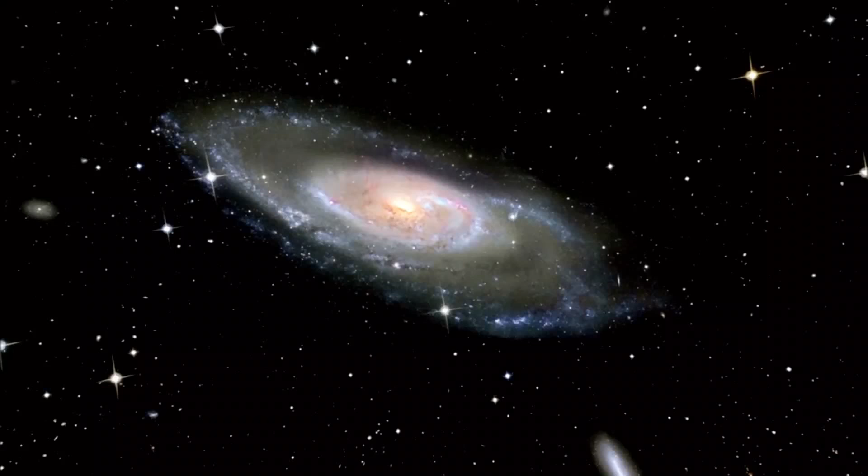As a scientist, I have to build the puzzle pieces that I need to build this history of the universe. The Canada-France-Hawaii Telescope is multifunctional. We need to think about solutions to improve the instrument, to make things work. One of the most impressive discoveries we made here is an object that came through the solar system, and we were able to catch it. So we're trying to predict the evolution of the universe for the future.

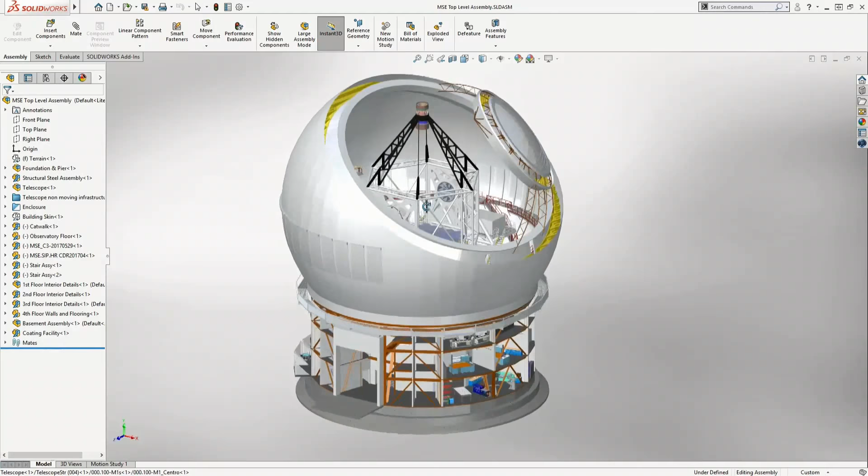So if we look at SOLIDWORKS 2019 here, and we look at Greg's model, the entire telescope, there's about 7,500 parts in here. And you can see as I grab this and just move it around on the screen, it actually feels like it's a simple block on the screen. So you can zoom, pan, rotate, very fast, very rapid. It feels—I think it's a feel. It's one of those things that it's a feel.

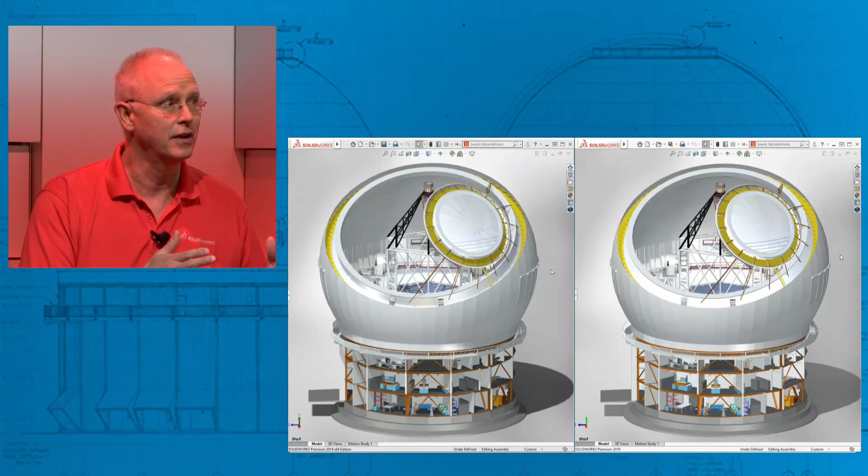If we take a comparison and try to compare what it was like in SOLIDWORKS 2018 compared to what it's like in 2019—18 on the left, 19 on the right—you can see that kind of chunkiness as the mouse has to catch up. Sid can talk better about this, but from a development point of view, they call those dropped frames. We have to drop those frames in order to get the model to rotate. In 2019, there's none of those—they're dramatically reduced.

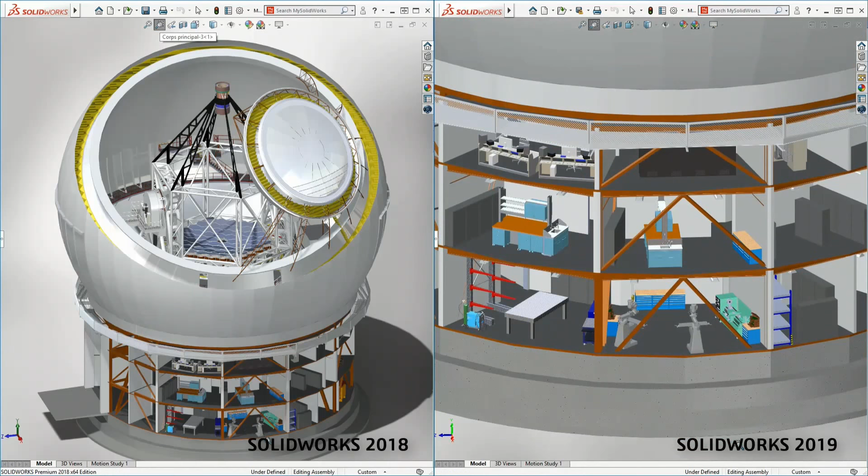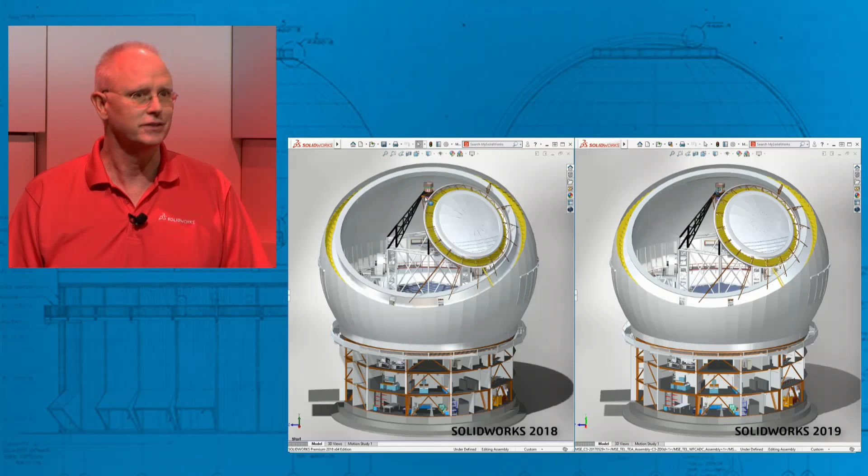It just feels so much better to interact with your model, zoom in, get to where you want to go, and visualize things so much better. You're still going to work with your assemblies—it's just going to feel better. I think Sid describes it as an emotional thing, and it really is. It just feels like, wow, this feels like I'm rotating a block around on the screen.

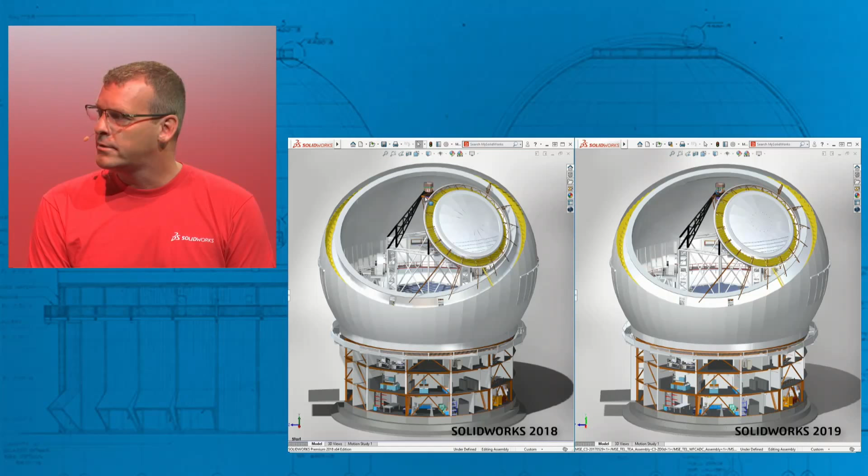So to leverage this, do I have to turn on a special mode or anything like that? That's a great question. So what we're doing with this new graphics work that Sid has worked on is we've pushed a lot of the work we did up onto the graphics card. So instead of it being on the CPU or the main chip, it's now getting pushed up onto the GPU, or the graphics card.

We've done a lot of things in the past with large assembly mode to make an assembly perform and interact a lot better, in large design review and these different modes that we have. And we did that, but when you did that, you lost your real view, you lost your edges, you lost your shadows, and a lot of the visual appeal.

And with the new stuff, you can do this. You have your full real view, full shadows, reflections, ambient occlusion—things like that are available in any mode: large assembly mode, part mode, fully resolved, lightweight, LDR. It really doesn't matter.

We're going to see this in other places in the software too, right? Right, Sid can talk about that. Yeah Sid, this is pretty groundbreaking. I have to imagine some really interesting technology or thought went into this.

That's right. One of the things is that our customers are really passionate. They're amazing—they spend a lot of time building huge data sets, putting in a large number of materials to make the data sets look good. And when you have to deal with millions of polygons with hundreds of materials, it becomes quite a challenge of how do we make this as performant as possible for our customers.

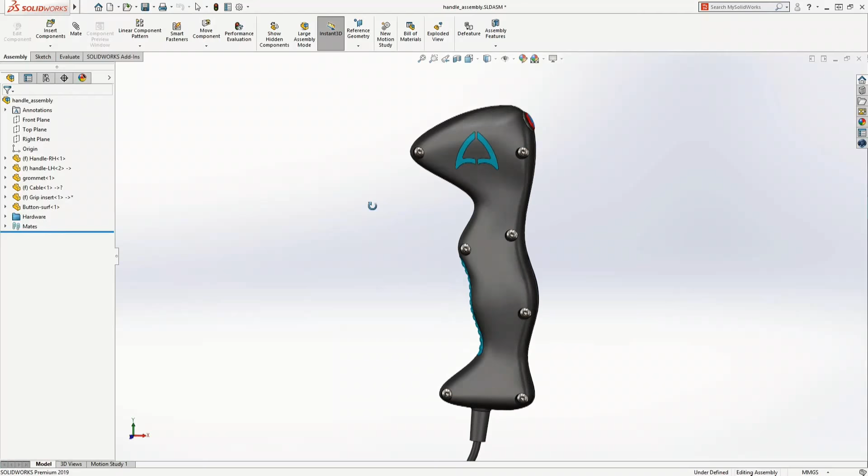Marlon mentioned the mesh modeling, and a lot of people are adopting mesh modeling, whether they're getting information from scanned models or artistic type of stuff. So this model we have on the screen here is kind of a handle, an organic shape. In this case, this actually originated from a 3D scan model.

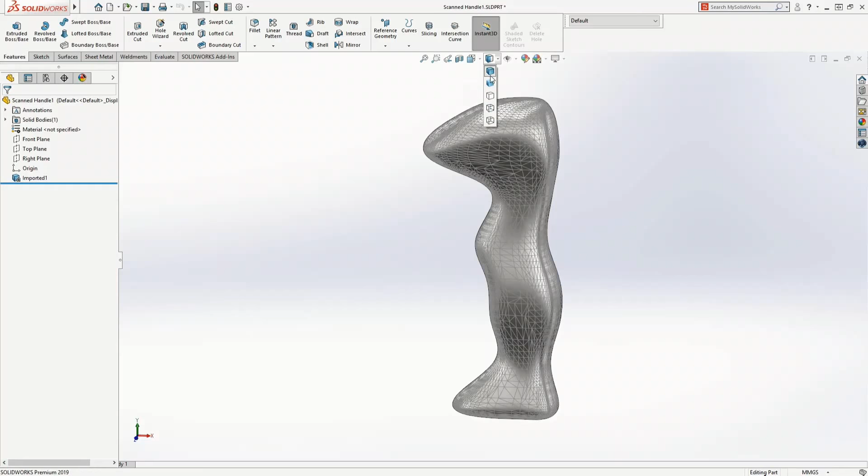So we're just opening a 3MF file. You can clearly see this is a mesh model - you can see all the mesh edges on there. But what people want to do is take this scan model and actually turn it into an engineering model that they can shell, add ribs and standoffs and all the internal stuff they want. So we added this new slicing tool.

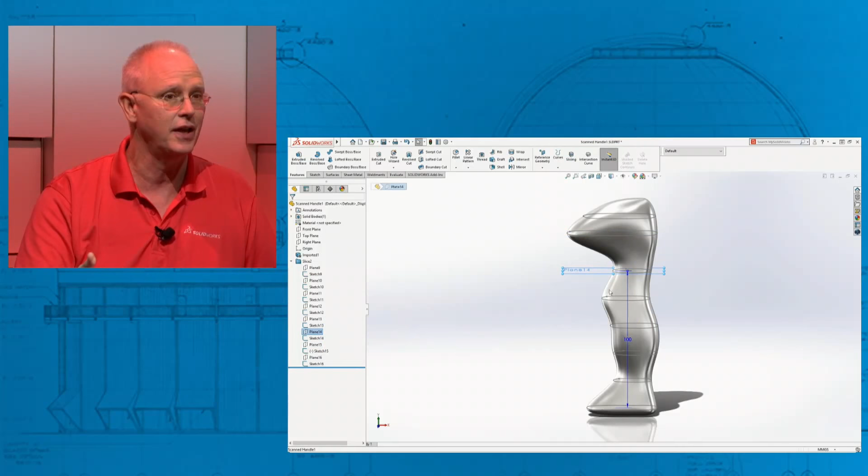You choose a plane, you choose your offset, and SolidWorks creates a folder full of planes and offset sketches that are fully editable. So you can set these up to start using these sketches to build your model. We'll turn off the mesh body and just use standard SolidWorks modeling techniques, leveraging that mesh information, then just grab these curves that were created, and there you have it - we have a surface already started to build our model. That's one of the cool things.

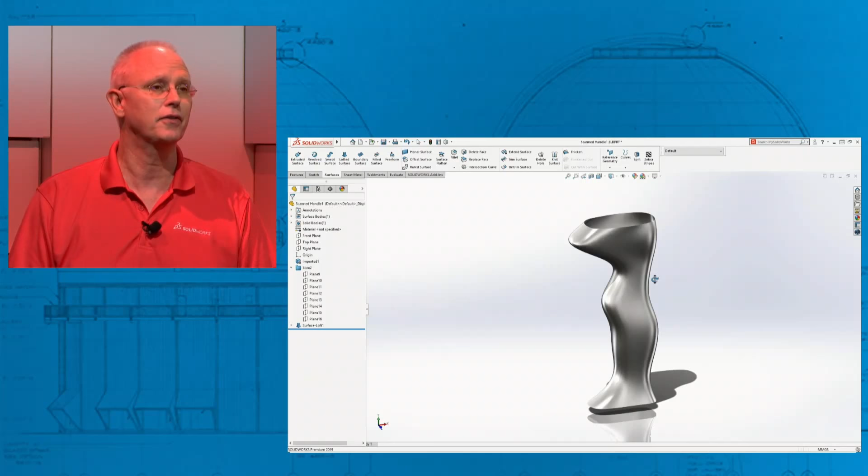As Marlon and Sid mentioned, the 3D texturing stuff - if you have a model like this grip insert here, this little blue part, maybe we want to experiment with various different grip patterns. You can see that's a lot of features - there's 14 or 16 features to do that. The new 3D texturing allows you to do this rapidly.

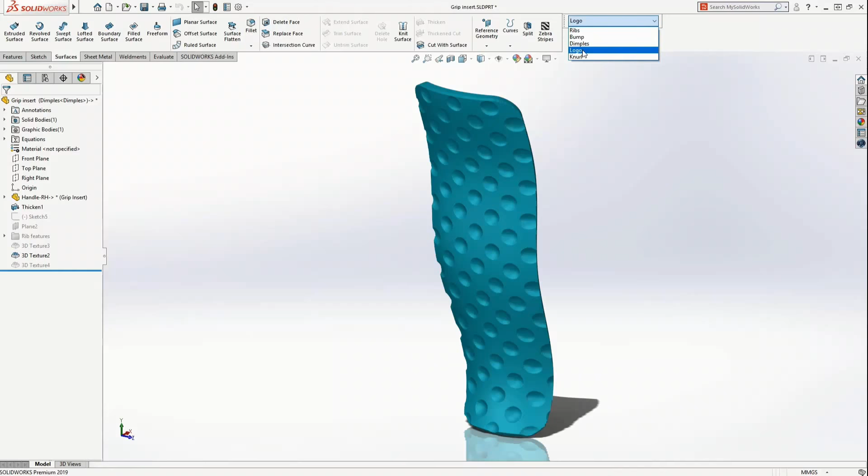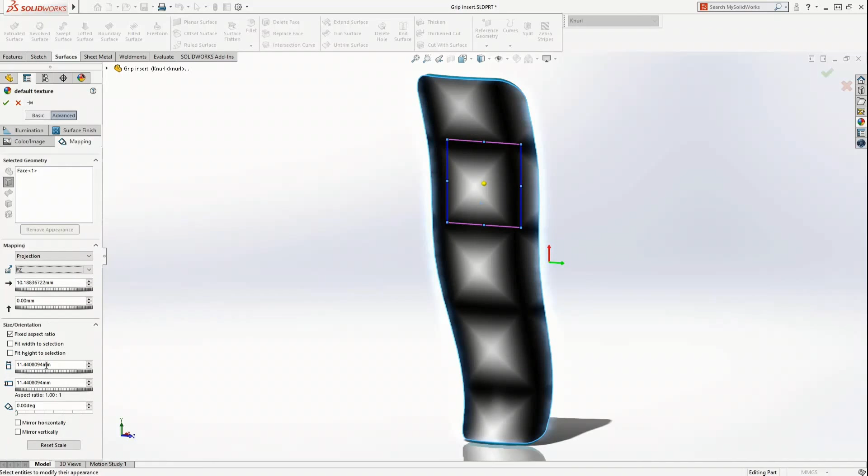Instead of having to model those dimples or bumps or even something like this logo, we've given a new methodology for doing this. You're familiar with applying textures or appearances - I'm just going to drag one of these from the task pane onto the model, standard ways of applying materials you've been familiar with in the past. In this case we have a knurl pattern, change the size, change the rotation. So all I've done is apply an appearance.

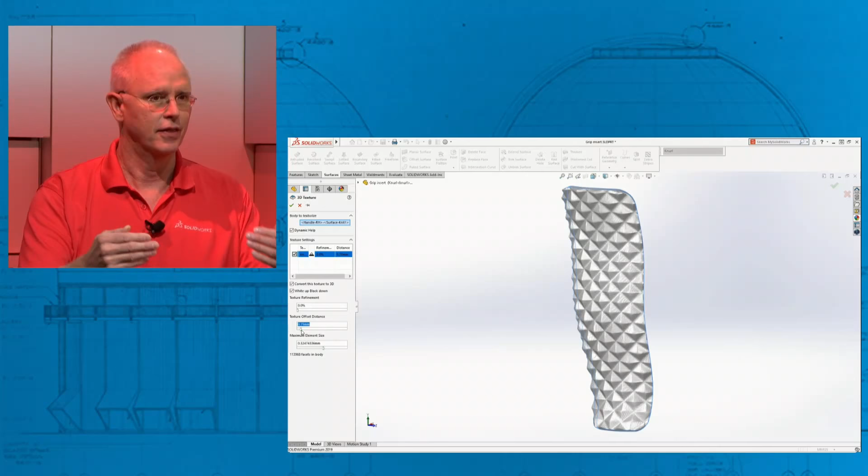Now we have this 3D texturing tool that leverages that appearance and allows me to turn it into mesh geometry. I have controls over the mesh size, I can change the height at which I want that to pull out. The lighter colors pull farther out of the material and the dark colors stay back. So what I've done is use this new tool to create a mesh model.

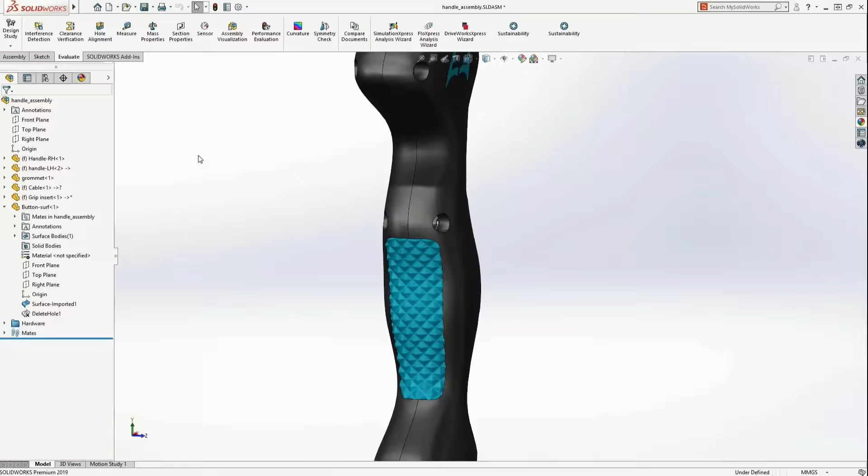This mesh model can then be used downstream for manufacturing - maybe I'm just building prototypes, I might want to create a 3D print of that. So that's a mesh model, and 3D printers accept mesh models - that's their basis of how they build stuff. That's a cool way to leverage this whole mesh modeling methodology to take it from start to finish.

Yeah, that was a huge time saver thinking about having to create all those details as features. There were 16 features just for those horizontal ribs, which are a little easier to do, but trying to create that knurl pattern, all those dimples, all those bumps, that's difficult. We're really doing a lot of stuff with mesh as a geometry type inside of SOLIDWORKS, and we're going to be discussing this a little more later today.

Now, Marlon, that was a big feature - that's like new technology, new feature. But you also look at improving existing features and workflows, right?

From all the feedback that we gather, we see new capabilities that we need to implement in SOLIDWORKS, but also we look for opportunities where we can make the user's workflow more efficient. They can do the same thing now that they could do in a previous release, but we work to make it more efficient, so their experience is more enjoyable and faster. Ultimately, the goal is to save time. We call these projects Delighters internally.

Any delighters that stand out in your mind that are going to be really great this release? I really like partial edge chamfer, and we've also made improvements to projected curve, to make geometry you could create in the past, but now it's a lot more efficient in SOLIDWORKS 2019.

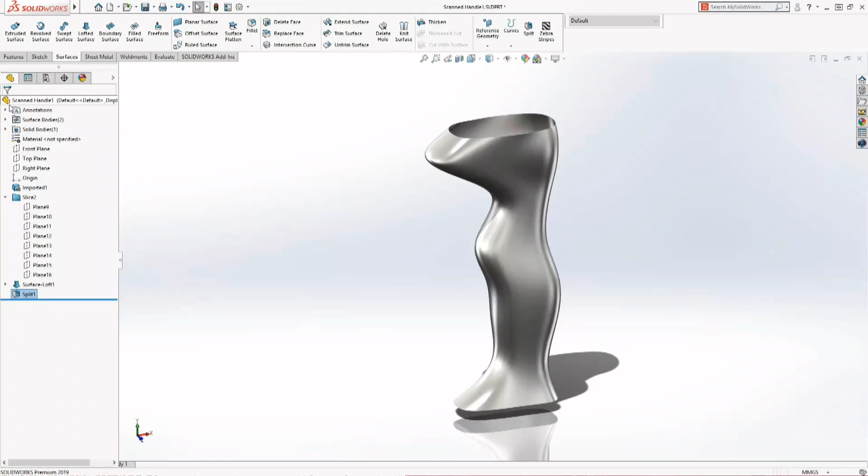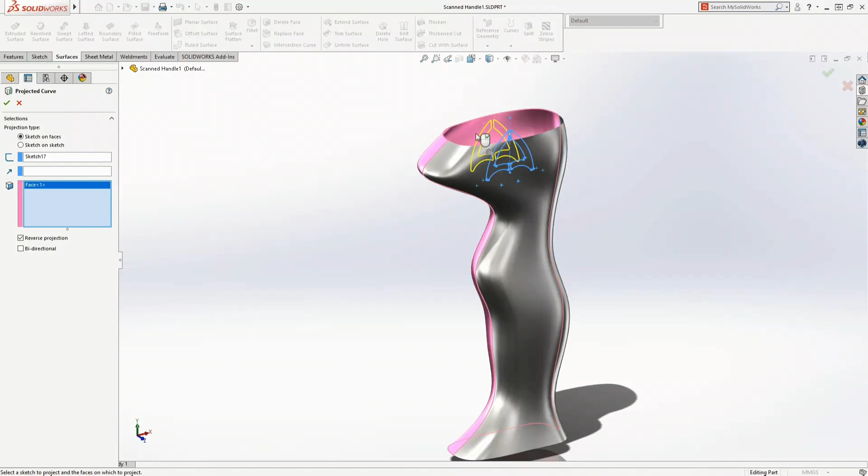So in this case here, we have this handle we kind of got started with, and you can see there's two surface bodies in here. In the past, we could only project in one direction onto a single surface body, and we could also only do a single closed or open profile to get that projection. Now in SOLIDWORKS 2019, multiple closed or open profiles can be projected onto multiple surfaces and bidirectionally. Here we're going to choose the bidirectional option, and it puts it onto both surfaces.

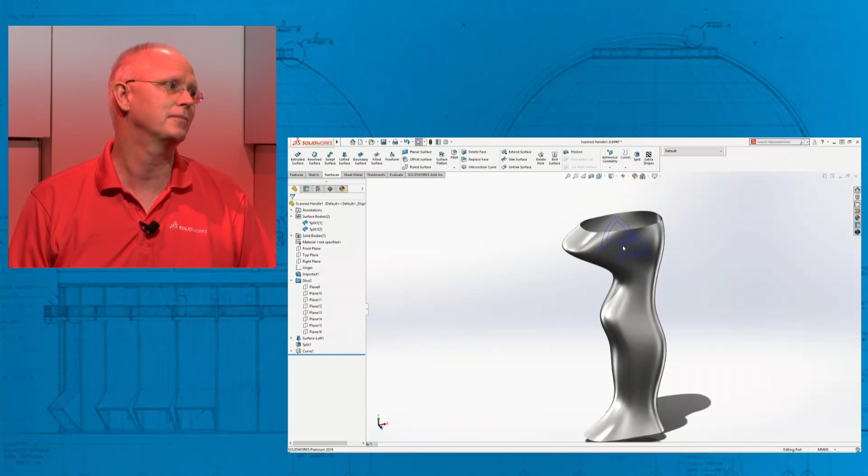Jeremy, in the past this would have taken 2 sketches for the 2 closed profiles and then 4 features to project it onto each side. So we've gone from 2 sketches and 4 projected curves to a single sketch with a single projected curve. A lot of big time saver there. Not only is it an easier workflow, it's less features in the tree, less steps, and everything's stored in that single feature.

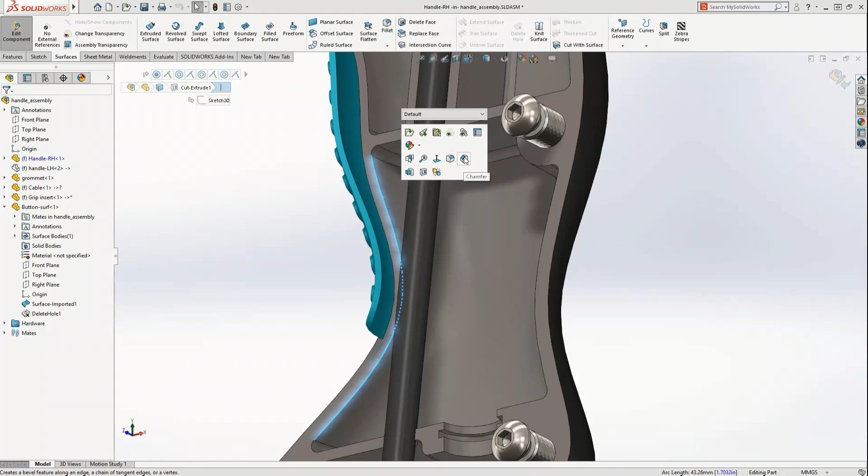The other thing that's interesting is the partial chamfer. You can see I did a little quick interference detection, and I have an interference problem, so I need to knock that corner off of this model. I'll edit that part, choose the edge, and chamfer it. But I really don't want to chamfer that whole thing all the way around, so we've introduced a new partial chamfer tool.

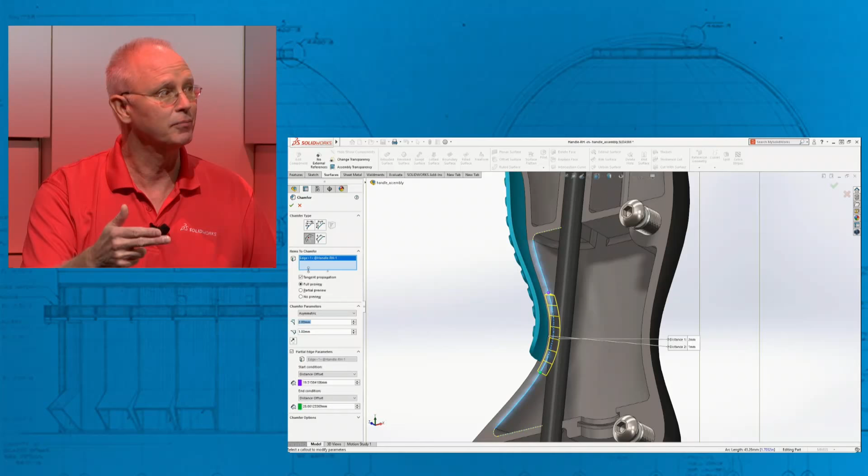I have various options for how I want to control the distance, or I can just use the drag handles right on the screen. These can be symmetric or asymmetric, and by the way, this is a chamfer, but this can be done for fillets as well. I can switch back and forth between chamfer and fillet, as we've had in the past. We could have modeled these things before, but there's a lot of extra time and steps involved to achieve that same goal. This greatly simplifies that process of defining that.

So these are some really cool features, and there's a ton of new features also on the What's New section of the SOLIDWORKS website where you'll be able to see them. We're just showing some of the real highlights here today.

But Marlon, you were mentioning you get an opportunity to talk with customers a lot. We have SOLIDWORKS World coming up here in the near future. You're always busy at SOLIDWORKS World, right? Yeah. Tell us about that, how customers can engage with you at SOLIDWORKS World.

For us in product definition, it's like drinking from a fire hose at SOLIDWORKS World, because for us it's a 5-day event. It starts on Saturday, though the conference officially starts Sunday evening. On Saturday we're doing alpha testing with customers, and all day Sunday we're meeting with customers throughout the event. In fact, we take a break just to give our presentations during the conference. The entire goal is to learn more about the user's experience using our software, what enhancement ideas they have, and what things we can implement in the future.

When you register for SOLIDWORKS World, which you can do today, there's an option to say you would like to participate in our research activities. If you check off that option, that's how you get invited to the Saturday and Sunday events. That's great.

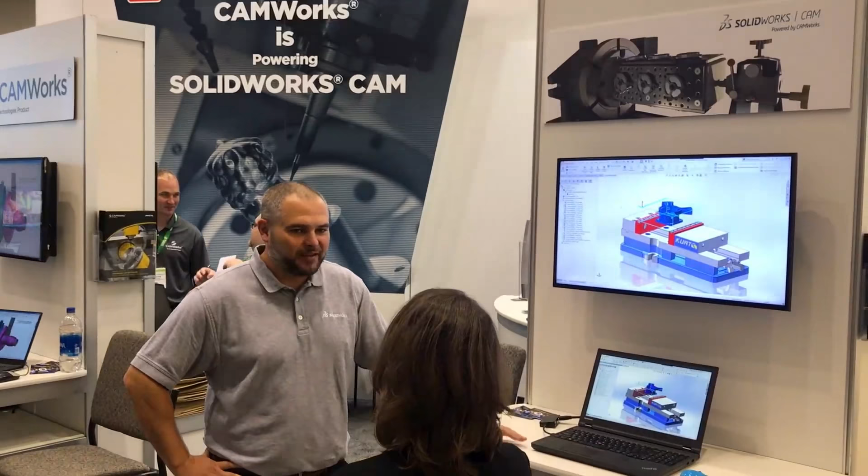Hey, we're here at IMTS. We've caught up with Mike Buckley. Hi, my name is Mike Buckley. I'm a product manager for SolidWorks, and I'm in charge of SolidWorks CAM and our subtractive manufacturing. One of the reasons I'm into manufacturing is I love building and restoring old cars.

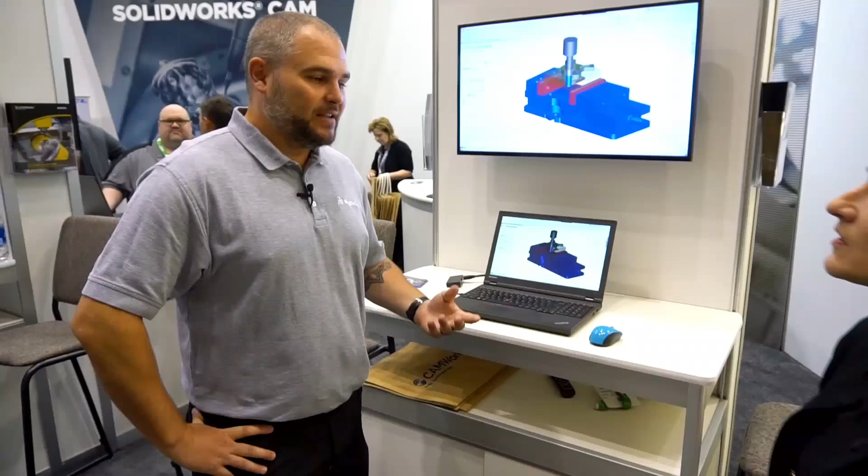So Mike, we're here at IMTS. SolidWorks is everywhere at this show, but SolidWorks CAD, everyone knows that. SolidWorks CAM, that's pretty new. So first thing everyone needs to know is SolidWorks CAM Standard comes with every seat of SolidWorks. Starting with SolidWorks 2018, we actually released SolidWorks CAM Standard and SolidWorks CAM Professional. CAM Standard is available to anyone on subscription, so every seat of SolidWorks has that.

It allows you to do basic part machining. And then SolidWorks CAM Pro is actually for people that want to be more productive. So we've added things like assemblies, turning, volume mill for high-speed machining, those components. So it's a pretty exciting time to use SolidWorks and CAM together.

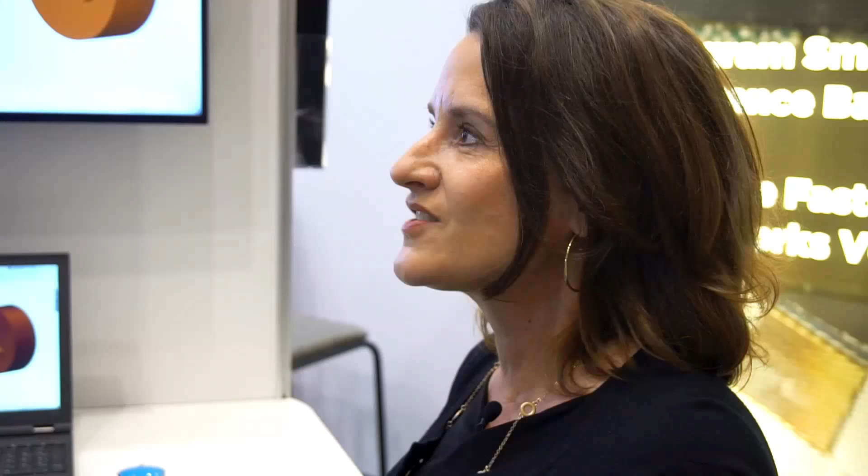So SolidWorks CAM 2019, what are our customers going to be most excited about in terms of new enhancements? There's some really cool things coming in 2019. The first thing is tolerance-based machining for turned parts, so we can apply the MBD data automatically to the toolpaths we create inside SolidWorks CAM. It's going to really speed up that process and create a program that's going to be right the first time.

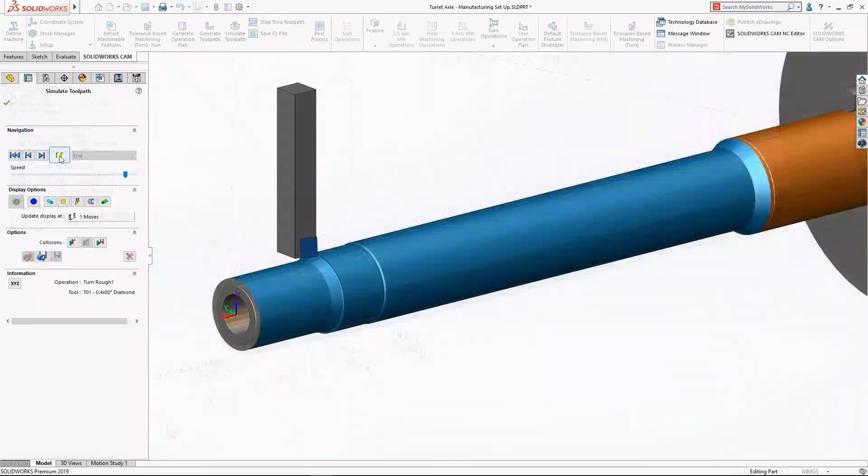The second thing, which I'm really excited about as a mill person, is for VoluMill we're adding rest machining, so I can come back and clean up the pockets with smaller tools and maintain tool life, which is pretty important for some of us that have to buy our own tools. We can also do zigzag on high-speed machining, so if I'm cutting a really long part, I can remove more material faster.

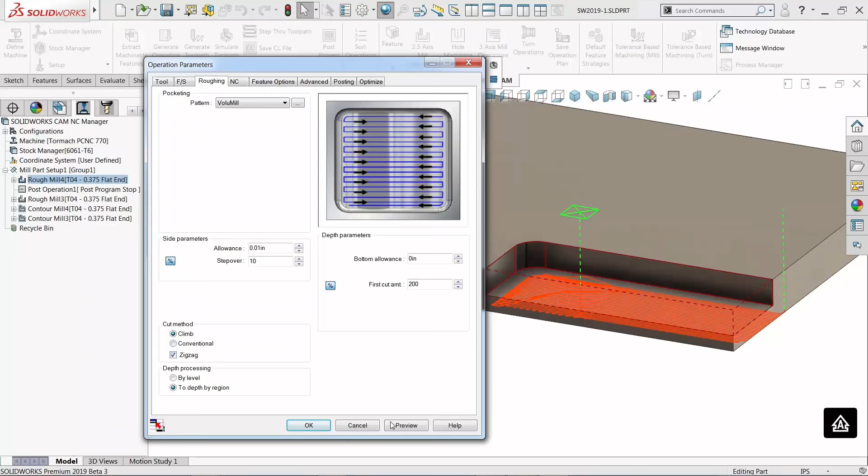And one of the things that's going to be really good for customers with lots of different types of machines is I can do machine-specific rules in SolidWorks 2019. So if I have a mill and a lathe and a water jet, I can apply specific rules for each of those machines automatically. It's going to be really cool for our customers to automate that process from start to finish.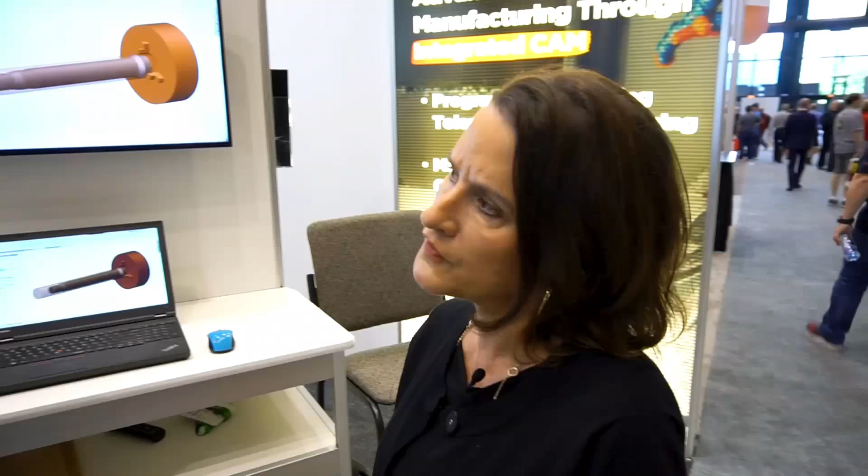The first thing you mentioned was tolerance-based machining for turning. What exactly does that mean? Yeah, it's a really good question because we get a lot of those questions when we start talking about tolerance-based machining.

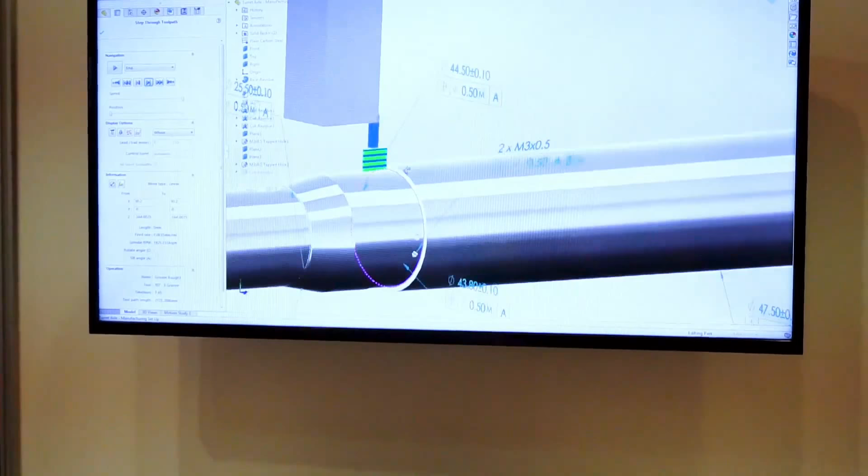So the first part is we actually use the dimensions that were applied in the 3D model. We're using that MBD data that was created. We know what the engineer wants for specifications, and then we go through and read these tolerances on the part and automatically apply toolpaths. So we're taking what the engineer and designer wanted and their thought process, and auto-leveraging that for the machining strategy, making sure everything is in tolerance correctly the first time.

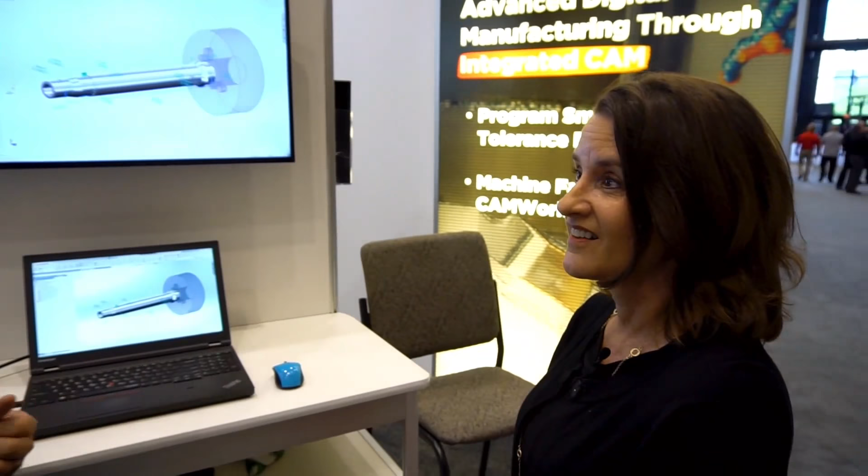Wow, that sounds like smart manufacturing. Yeah, it is. That's one of the coolest things we have today, being able to leverage that one file to capture all of the design and manufacturing intent. Now, does that extend further downstream into quality and inspection?

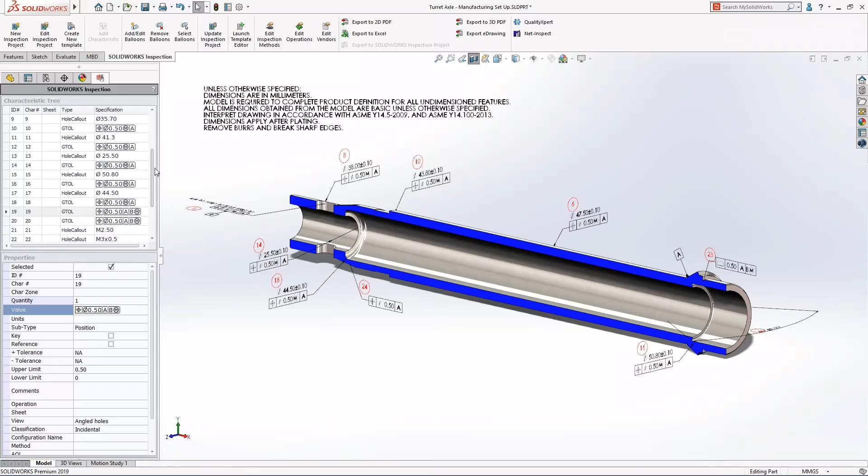The great thing about MBD is it creates that container with all the data sets in. So if we apply inspections to this part, we can auto-balloon all of these. As we machine it, we know we're creating those tolerances correctly. From the inspection side, we have the automatic inspection report created from SOLIDWORKS Inspection, so people are keeping that consistency together. The cool part is if the design changes or a revision happens, all of that information updates automatically on the fly. There's no need to go to separate sources to update and track that information. It's a pretty cool process.

Users on subscription get CAM for free, which is awesome. And all these capabilities sound really exciting. But what about just the machinists who basically just need to open part and assembly files?

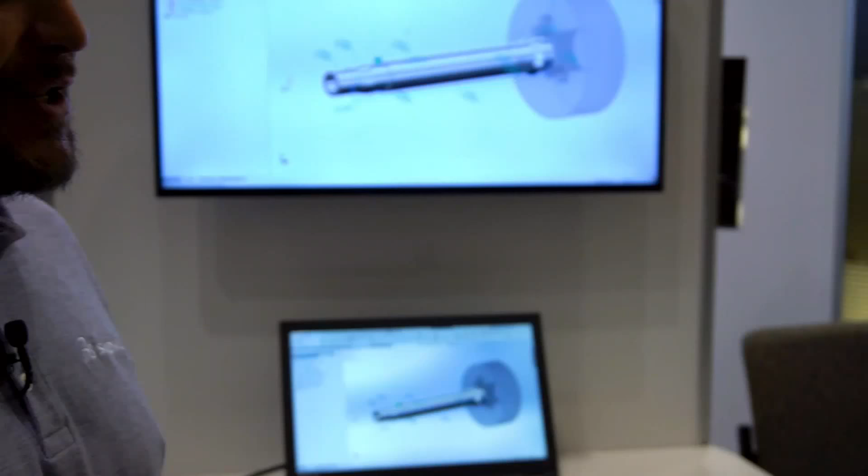That's a really good question. Starting with 2019, we've created two bundles: Machinist Standard and Machinist Professional. Machinist Standard allows a machinist or programmer to open up a SOLIDWORKS part file or import any customer's file and do programming on a part. Machinist Professional allows you to open up parts or assemblies, design fixtures, and then use SOLIDWORKS CAM Professional. So for people who may not need all that capability in SOLIDWORKS, we now have these packages that allow them to access all the cool things within SOLIDWORKS and all the great modeling capability we have, but still be able to put any of the high-end toolpaths on it that we need.

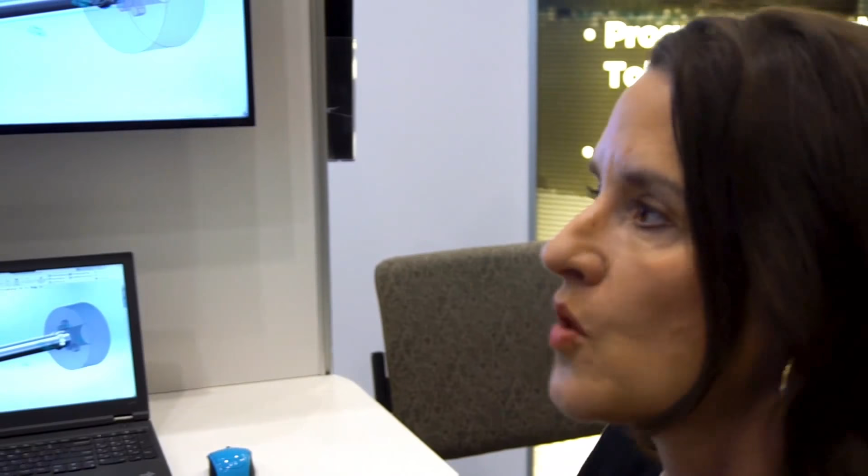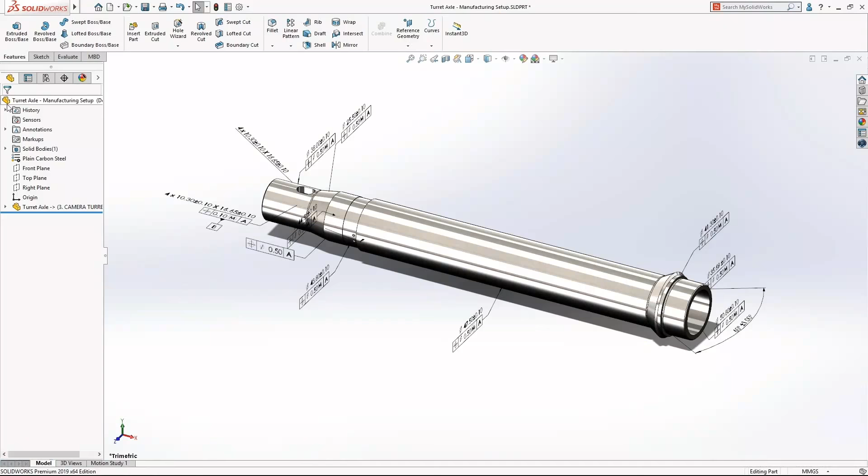The basic understanding of smart manufacturing is from start to finish, you have one file, one truth, where all of your data is stored. When you do concept, simulation, FEA, all of that information gets stored in the file. On the manufacturing side, we're talking about capturing inspection data, capturing PMI data, and leveraging that for CAM. The ecosystem within SOLIDWORKS allows you to have that one part or assembly as one file to rule them all, with the ability to store all that information. If there's a revision, a change, or questions, you just go to that one location and that is the truth of what's being built.

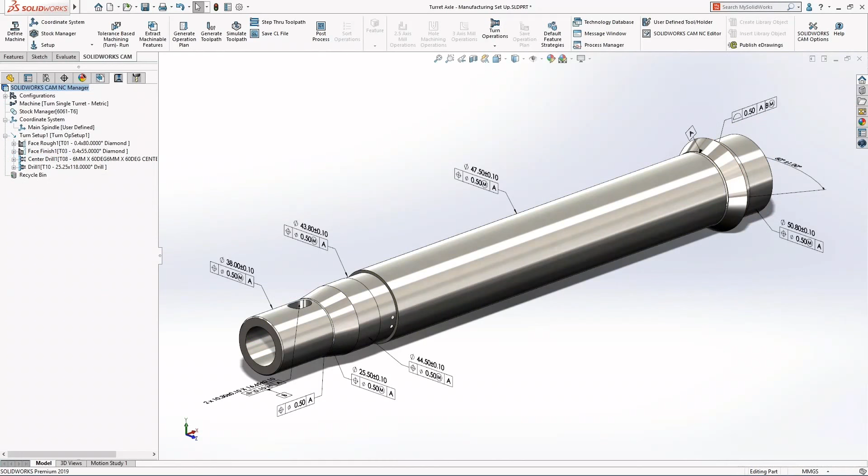A lot of systems today that aren't smart manufacturing require you to export or import all these different files. If there's a problem, you may not know where it resides. By having all of that in one file, we can tell where the problem is going to exist if there is one.

Wow, it sounds like SOLIDWORKS is all over CAM and there are so many exciting things happening this year. So is there anything else happening in manufacturing with SOLIDWORKS that we should know about?

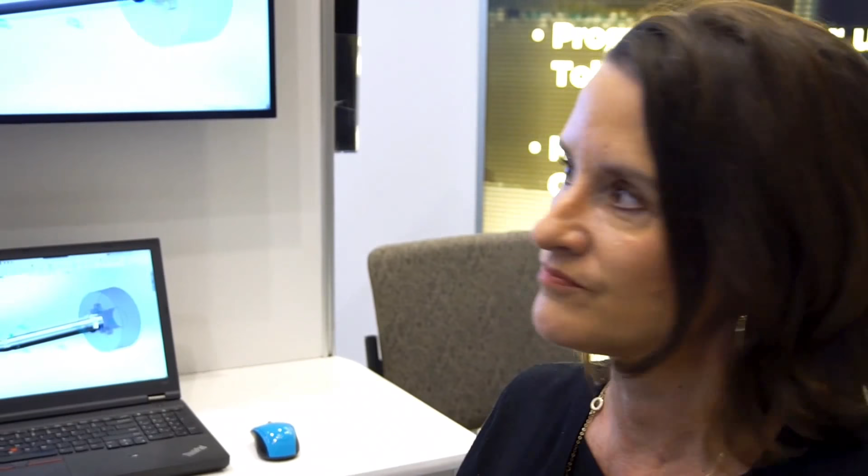One of the great things we're doing for our students this year is starting with SOLIDWORKS 2019 in education, which came out this fall: all seats of SOLIDWORKS education get SOLIDWORKS CAM Professional. Every student has access to MBD, tolerance-based machining, volume mill, all of the great things we've talked about. They all have access to that starting today. It's a pretty cool, exciting time for students to get in and build products.

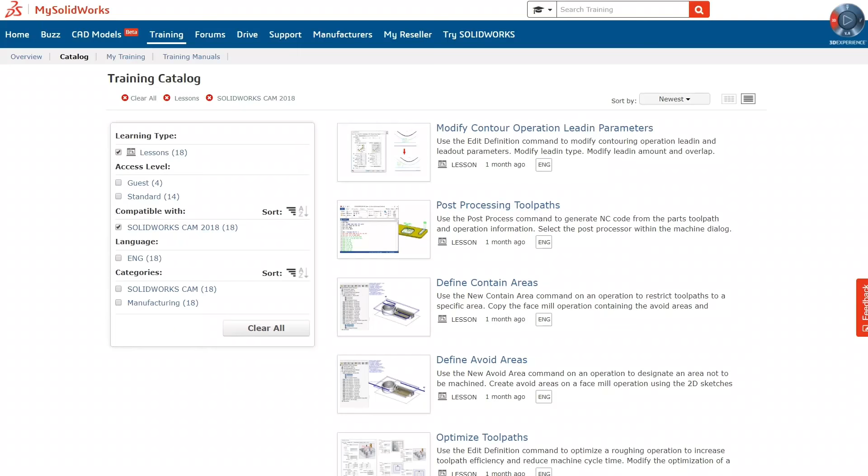So we just talked to Mike, we heard about all the cool new enhancements in SOLIDWORKS CAM 2019. We talked about milling, turning, tolerance-based machining, and of course it all starts with model-based definition, but even downstream to inspection and quality. SOLIDWORKS CAM 2019 provides all the puzzle pieces for your smart manufacturing initiatives.

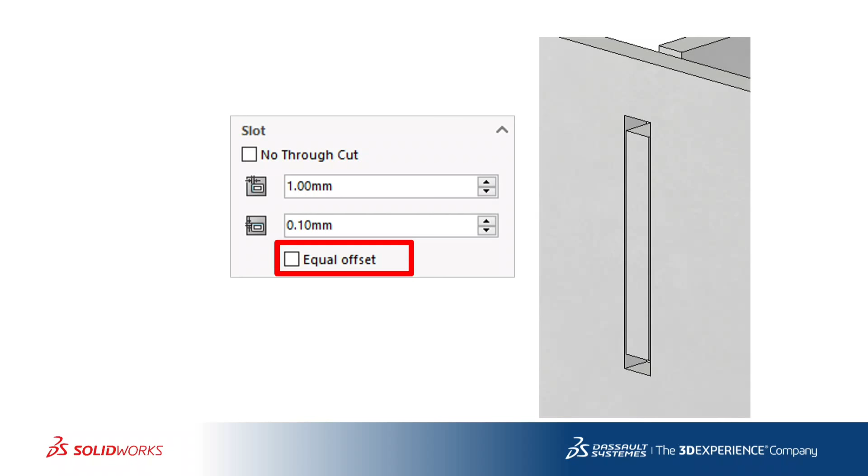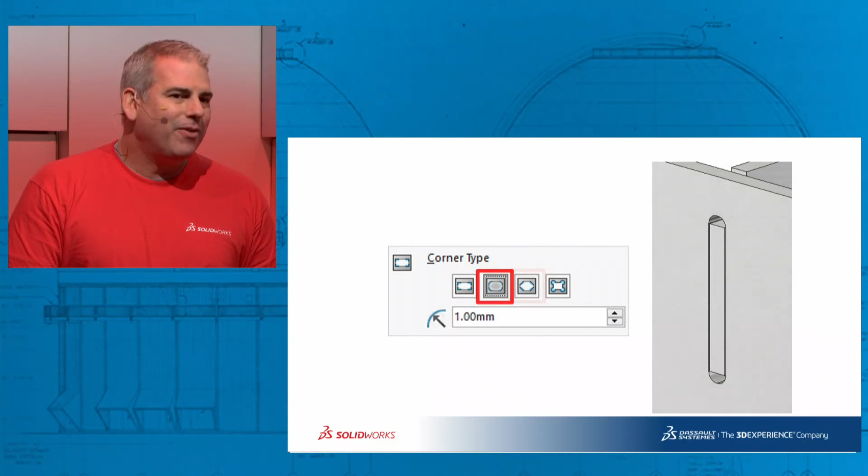So the very first one you see is in 2018, your tab was always centered in your slot. Now you can offset it - just a simple tab, but it makes it very easy for users. As we move forward, last year we had just a square corner, but in 2019 we've added round corners, chamfered corners, and even dog bone or circular corners in the edges. Again, this is critical when you make your flat pattern for the laser cutter and for downstream manufacturing operations.

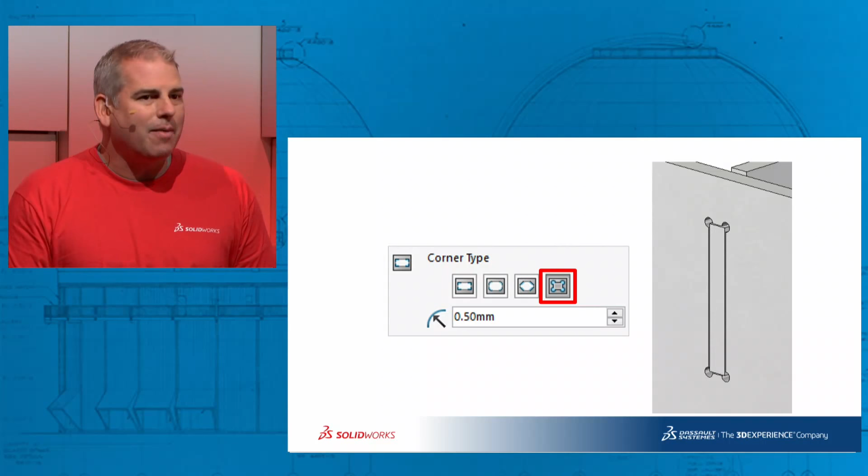So last up, this one's actually really neat. If you don't want to have a hole in your part where the slot goes, you can actually leave that out by not cutting it all the way through. So it helps make your design even more watertight if that needs to be the case.

So I have to imagine these ideas and features came from customers, literally like you were saying, they want to go right to the laser with this, and these are some great features. Now, we talk about designing for manufacturing - sometimes design has to communicate with manufacturing as well, and you were talking about some interesting experiences you've had there. Yeah, so on the shop floor, the shop floor has really gone digital.

When you go down to the shop floor, you used to see stacks of paper, 2D drawings that were paper. What you're seeing now are large flat screen monitors on the shop floor. Sometimes they're looking at a 2D drawing, but a lot of times they're looking at 3D models, and they're able to interrogate the models, modify them even on the shop floor. It's really changing the shop floor by having these electronic capabilities, monitors, PCs on the shop floor, and you're able to actually get directly to the 3D models more conveniently.

And we've always had a really great tool for this that we're doing some stuff with in 2019. You want to tell us about that? Yeah, a couple of tools, and obviously our big one, eDrawings.

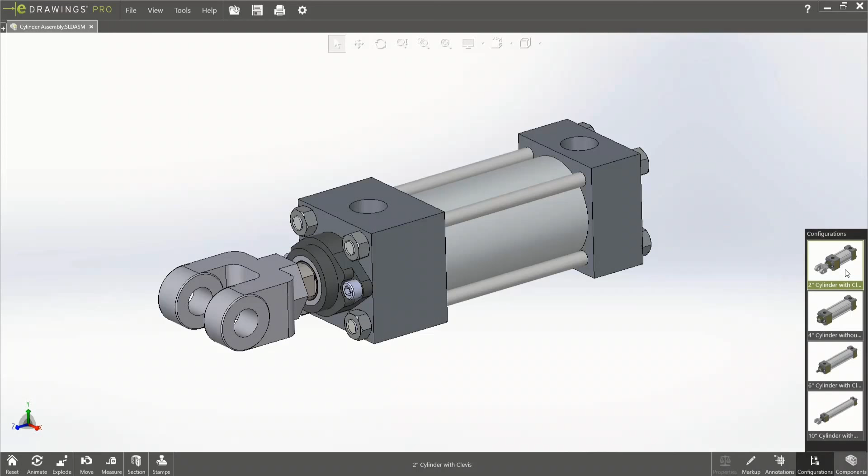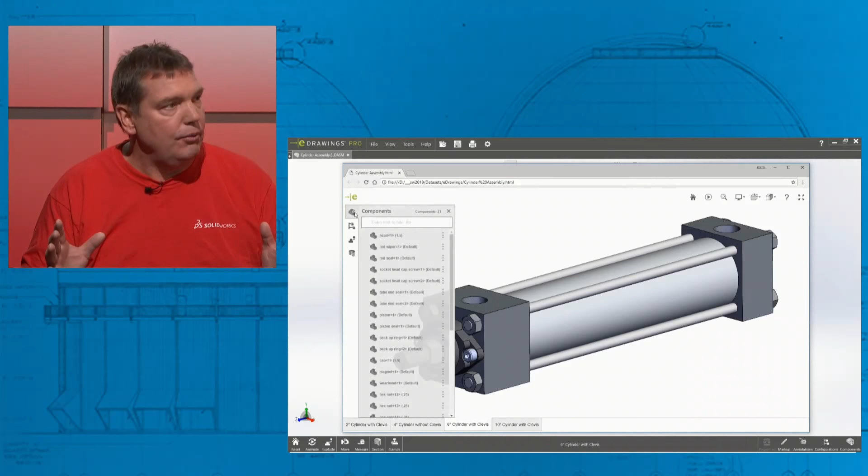In eDrawings, we've added the ability now to open more file types, so STEP, IGES, and also native CAD file types from other CAD systems. We've also added the ability to natively open configurations from SolidWorks files, from PRT and ASM files. And then lastly, and most importantly, I think the big thing is we can save as web HTML. So I can open that file and not have to do any kind of download at all, and just open it in a web browser. So I don't have to send you an eDrawings file, or have you install eDrawings.

Nope. Anybody on any device pretty much can open an HTML file, right? Right, exactly, anybody. That's great, and I think a lot of users know eDrawings is a great tool for sharing a 3D model with somebody, but sometimes it's more than just sharing a model. Sometimes it's taking the data from the model and going further, communicating design ideas or downstream applications.

Kurt, you have a lot of experience with this. Yeah, a lot of companies say we don't get paid until the final technical documentation goes to the end user. So we're talking assembly instructions, user manuals, maintenance manuals - all of that stuff can be brought in, concurrent in the design process with SolidWorks Composer.

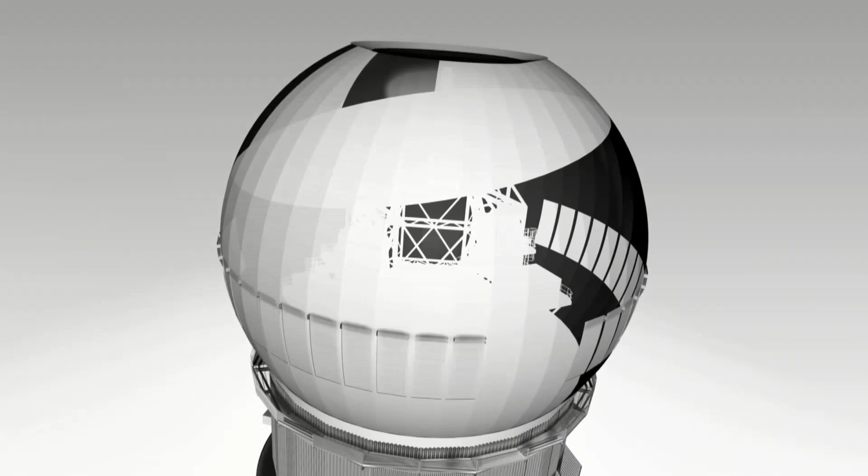And Composer's seen a lot of new enhancements in 2019 as a communication tool for this type of technical communication. In fact, one of the things Greg's going to be using it for is to share their ideas about what the new telescope looks like, up to their stakeholders and funders. So all of that information is right there for the user in one simple spot, fully created and fully associative to the SOLIDWORKS model.

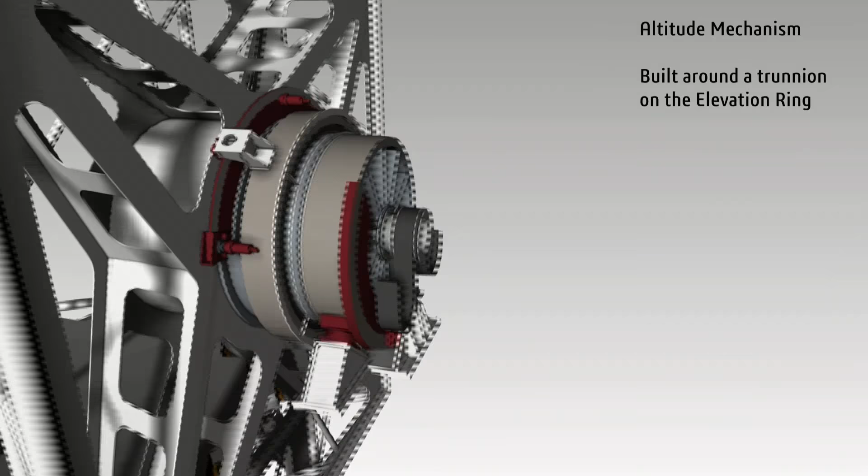Kurt, that's really exciting. What they're going to be needing to do with MSE, share their ideas, they really need to show how they're going to innovate, and they're creating an experience of how this telescope is going to come together. But that's something we're always focused on here at SOLIDWORKS as well.

And that brings me to my next guest, Kevin, with User Experience, who's actually involved in that. Kevin, thanks for joining us. Yeah, great to be here. Thanks, Jeremy.

Kevin, why don't you tell us a little bit - we've talked with folks from product development, product definition, product managers. You're in user experience, which is a little bit different. Explain to us what your group does. Sure, ultimately we're responsible for the user interface of SOLIDWORKS - everything from what the workflow is, how the user interface looks, to how users interact with it. We gather their feedback, put it back in, and make sure things are efficient and easy to use.

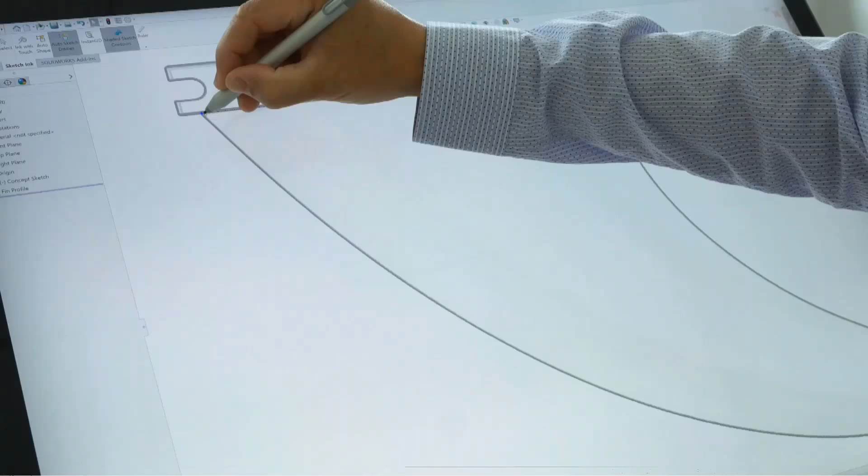Now, I think a lot of times users, when they think user interface, they think of things like buttons or right-click menus, but you guys are doing some really innovative stuff with some new technology, right? Yeah, sure. So in 2018, we kind of changed the game a little bit in terms of sketching, trying to work with pen and touch more and get away from picking and clicking icons and commands, and get more into just drawing what you want on screen.

So the first thing we got back from customers was, hey, I want to be able to do more things - I want to be able to do splines. So we added splines this year, which allows you to create things like a surfboard fin pretty easily. You just draw that shape and you get a very nice spline out of it right away.

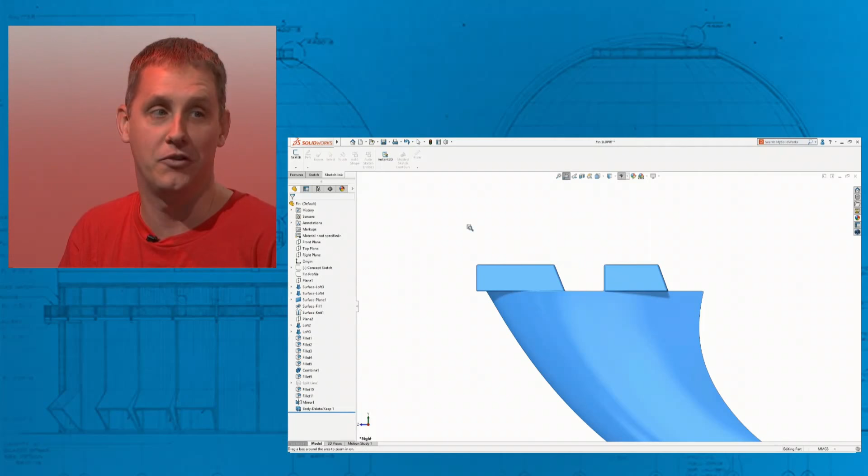The second most requested thing was slots. So if you're a mechanical engineer, you're probably creating lots of slots in sketches. Now you just sketch that in with a pen, the system recognizes it through Windows Ink, and you get nice slot geometry in your sketch.

Now that all feels very natural, but one of the things that would feel most natural to me is just writing down and dimensioning this. Yeah, well, the other nice thing Windows Ink gives us is handwriting recognition.

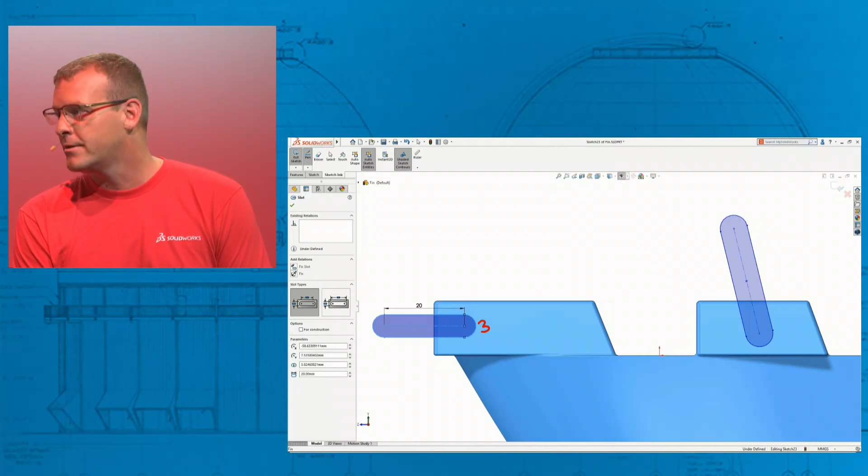So now instead of going and changing to the dimension tool, picking some things and typing in a dimension, you just write in the number 3 here, for instance. It recognizes that and adds the dimension for you automatically. So it really feels like my hands can stay on the screen if I'm on a touch device or a pen, and I don't have to go back and forth between the keyboard. Yeah, one of our key principles is users are here to create their designs, work on their model, not use our user interface. So this gets them a little bit closer to that, right?

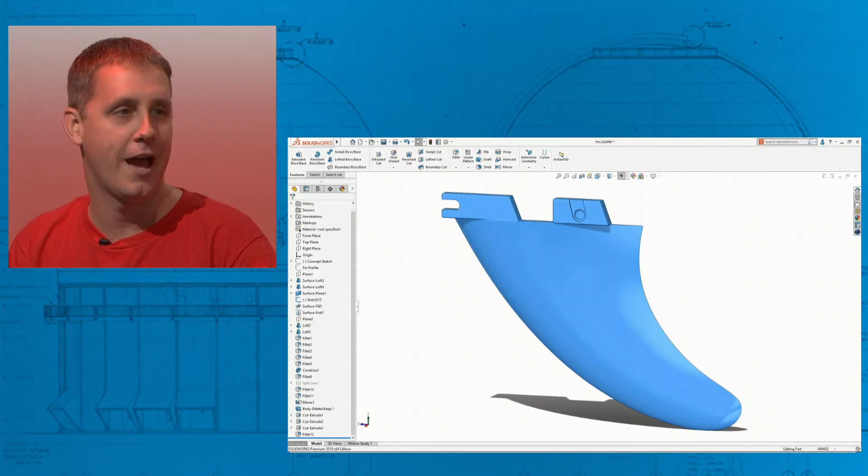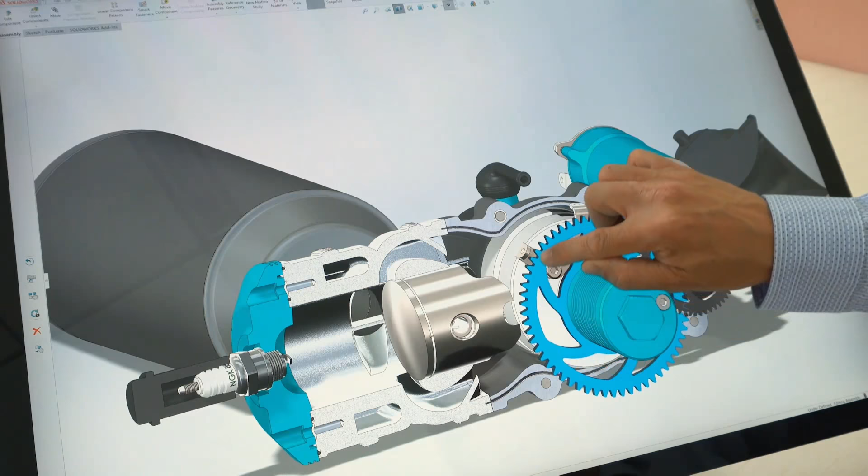Yeah, so now sketches are a great example of where these things could be used, but what about interacting with the three-dimensional model itself? Have we done anything there? Yeah, we've actually done quite a bit to make interacting with touch much easier. We've done some things like moving some of the feedback out of the way of your finger, but also now you can tap things, drag things around on screen. You can see he's adding some mates here. And then also just interacting with the model itself, so tapping on that gear and spinning the whole thing just works with the tap of the finger. This feels very natural, the way I would want to interact with my three-dimensional models. Yeah, exactly. That's the idea.

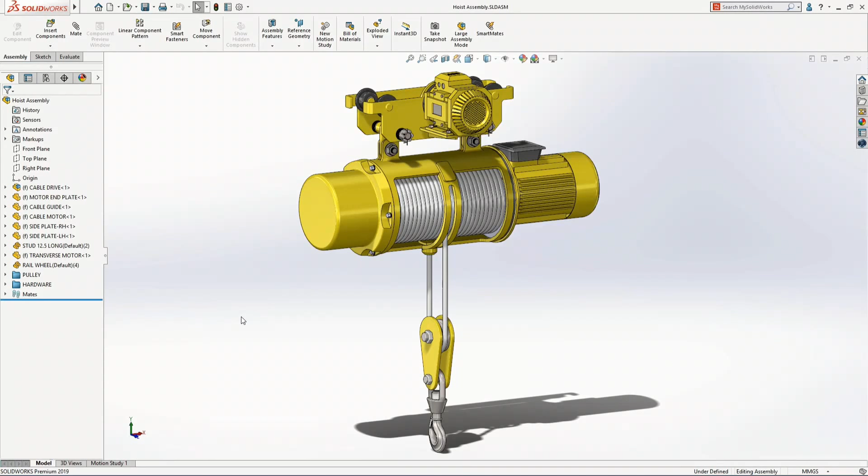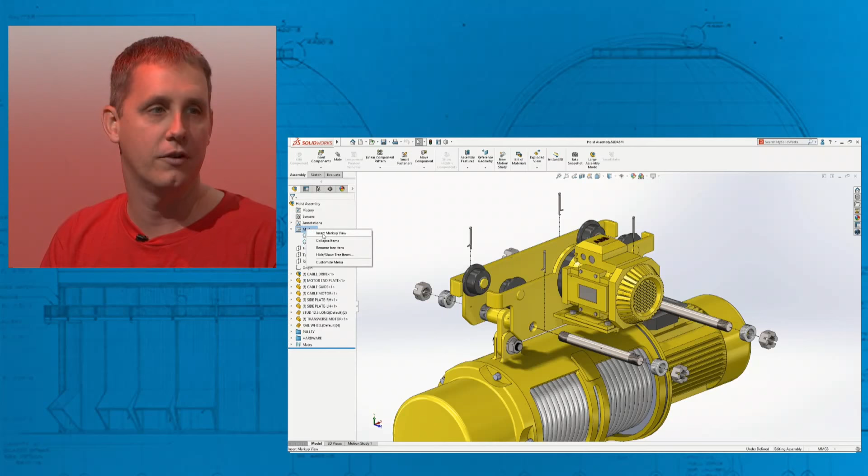Now, another place where it would feel very natural is the ideation phase or sharing ideas or comments. What about there? Are we doing anything there? Yeah, so we've added some functions in 3D markup. One of the key things customers tell us all the time is, you know, I take a screenshot, throw it in PowerPoint, draw some stuff on it, and then I send it off to somebody in the shop or a collaborator I need to work with. So we've just added this right into the SOLIDWORKS 3D model. You add a markup view, similar to annotation views, and you can just draw on the screen. That can be saved out to an image format and sent off very easily, and it's stored right there in the SOLIDWORKS file. Yeah, so likewise, the markup file is going to follow that file around wherever it goes, too. Yep, exactly. It's right there in the SOLIDWORKS model. I won't lose my napkin. Exactly. All right, that sounds good.

Kevin, all looks really exciting now. We had mentioned earlier the What's New section of the SOLIDWORKS website just went live. There's lots of new videos there for people to check out. What's something that you're really excited about that people should go watch? Two quick things. One, recent documents - we took that up to 100, so whether the welcome dialog or the recent documents dialog, you can get a lot more recents there. I think people will be excited about that. Also, we've done a lot of work to the external references dialog, so that's all been revamped, and how you work with it is revamped. And the dynamic reference arrows in the feature manager tree - you can break references, lock them, unlock individually right there in the arrows in the tree. So it should be pretty nice. Individually is the exciting part for me. Individually. Yeah, no, very cool.

Kevin, I want to thank you so much for joining us here today, giving people a little bit of a sneak peek at what they're going to see in SOLIDWORKS 2019. Now, we've covered a lot of stuff today. We looked at performance, some modeling enhancements. We went to IMTS to see how that went with smart manufacturing. We also looked at design to manufacturing and some of the new innovative stuff that we're doing as well.